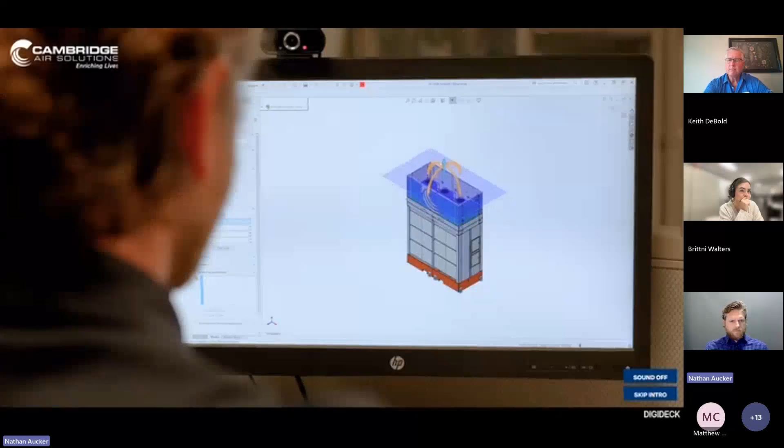Anytime somebody's really looking to change the indoor quality of the building, I think that's when Cambridge can really step in and start driving the ventilation requirements of the building, as well as heating and cooling it. We're looking to actually build healthier environments for people. It kind of started with us here. We like to do our product development, apply it in our facilities, understand the challenges we face, and solve them internally, then reproduce that for others who may have the same challenges in the field.

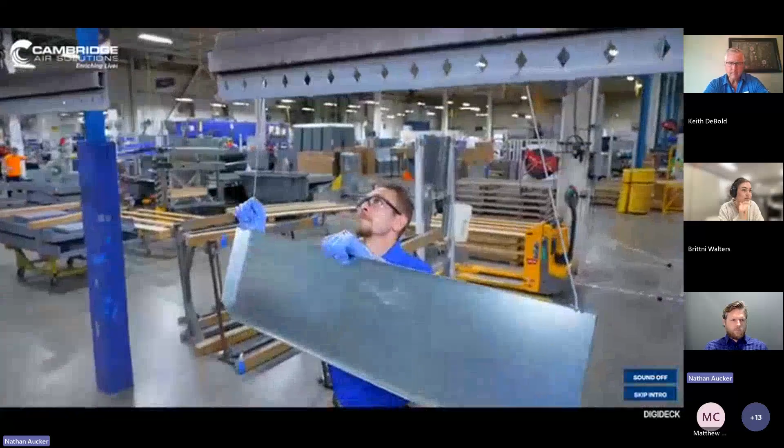Now we walk out in the middle of summer, it's 78 on a 110-degree outside day. The air is amazing in here, and I think that's honestly what we're trying to do for other manufacturers throughout the United States. The hardest thing to do when taking the first step towards a healthy working environment is to really understand what your options are.

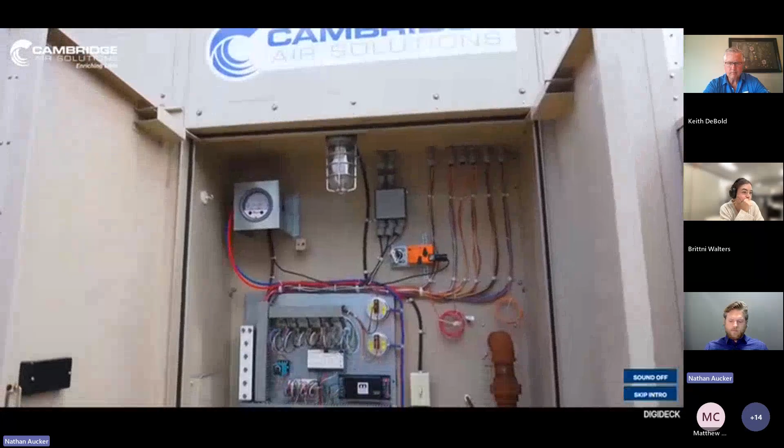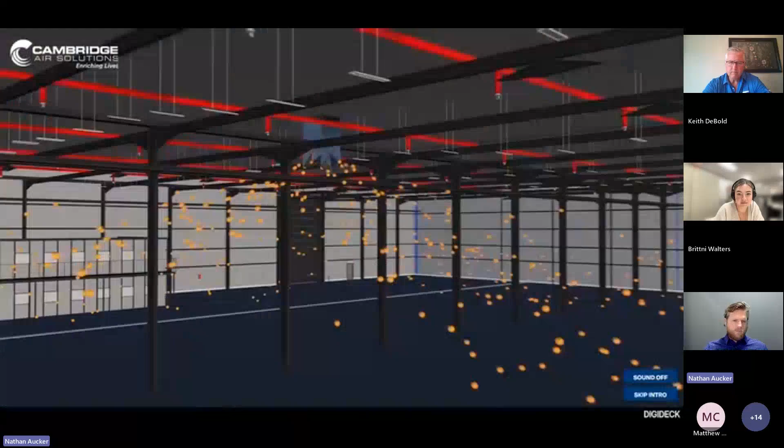Are they trying to solve for an energy goal, a sustainability goal, a decarbonization goal? Are they trying to solve for indoor conditions that are favorable to people? We first need to understand their challenges, what they're trying to achieve, understand their facility, maybe what processes are going on inside. Because we're not just going to say, oh yeah, give us a heat load, here's your quote, off with you.

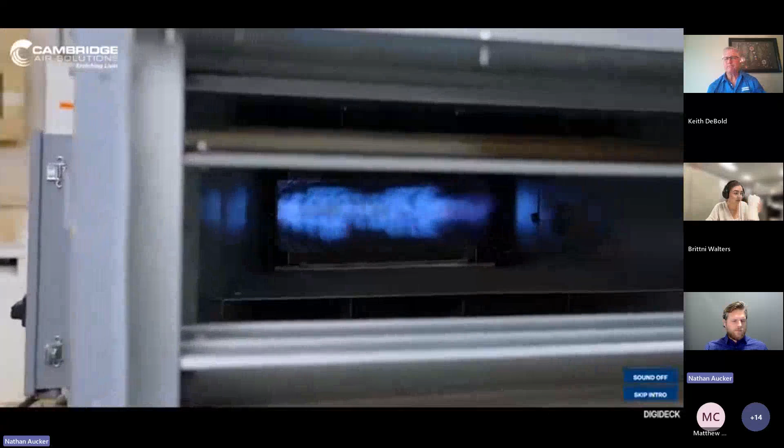We're going to actually have experts look over that design and ensure that we get the best possible solution for your building. We have built quality into our process all the way throughout the system. We test every unit that goes out the door to make sure it's functioning properly. We test the combustion, we test the airflow.

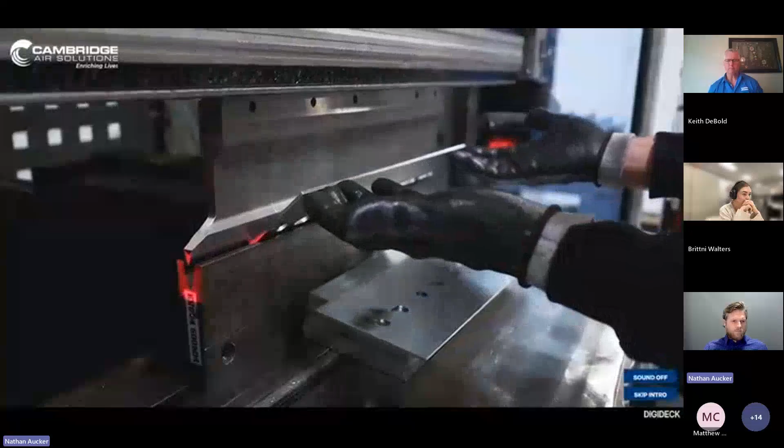This is not typical in our industry. Because we care deeply about quality inside our walls, that translates into building products that are going to last. That matters to us, and it can't just be for a couple of years. We want it to last for decades.

We talk about ease of doing business. We want to be the people that when you have a commercial or industrial space that needs heat or air conditioning, we're the ones you come to. Working with other companies, we're finding there's a desire for having a low carbon footprint and stewarding our environment. That rings really, really true to Cambridge and who we are.

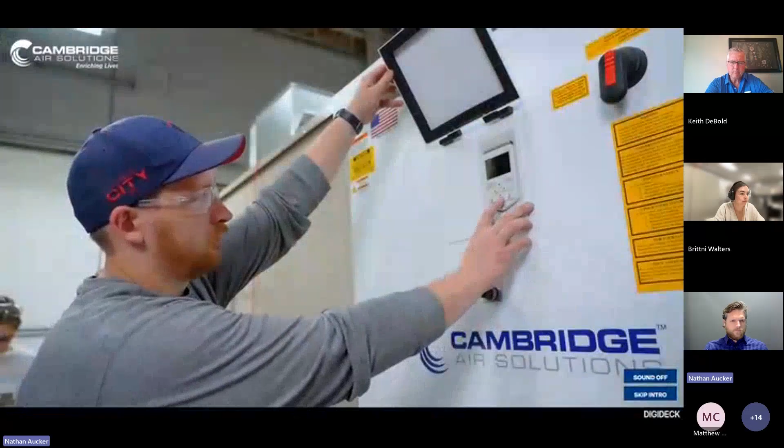For all of us to know that even the little things we do every day on the line, in the office, anywhere here at Cambridge, actually leads to another business having an enriched, fulfilling, and healthy working environment matters a lot to us. We exist to glorify God by enriching the quality of every life we touch. We are in that business of enriching lives through this system we've developed, but it's in our DNA, it's our big purpose, it's why we exist.

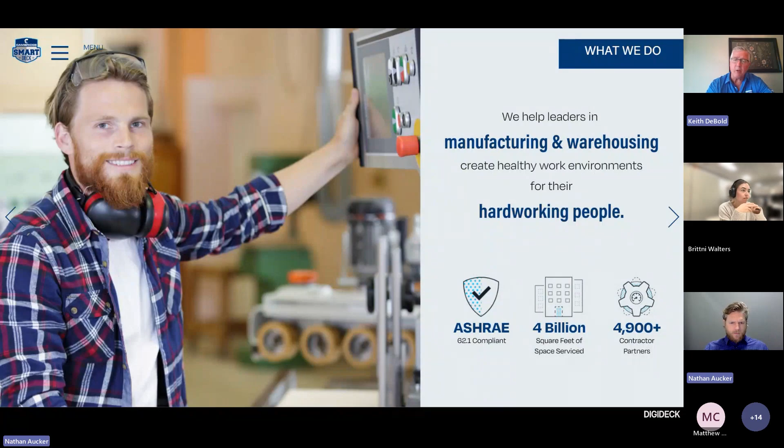So in summary, our sweet spot is heating, cooling, and ventilating open spaces such as warehouse facilities, manufacturing facilities, aircraft hangars, just to name a few. We have three aim points for the equipment we manufacture: to be the most energy efficient, to have the longest life, and to be available with the shortest lead times in the industry.

We go to market through manufacturers' representatives across the United States and Canada who are calling on mechanical contractors, engineers, and end users. Our rep partners team with our internal experts to develop building solutions that reduce our customers' energy cost, reduce employee turnover, and increase productivity and quality.

So when we talk about why it's important to build a healthy work environment: it's been interesting in our industry, facilities that people didn't look to cool, specifically manufacturing facilities. 5-10 years ago, there was a rush to cool these facilities. I have a customer who has multiple plants across the country, and they lose 20% of their workforce during the summer months because of elevated temperatures.

So the first reason people are rushing to cool these facilities is employee retention and to attract employees. Also, the second is the physical effect that the environment has on productivity and quality. And the third reason is health and safety.

So if we just step back and take a little bit of a snapshot, I'm not going to get too deep into this, but just to give you an overall view of the state of manufacturing in the U.S., and I'll couple that with Missouri since we're in Missouri. Currently, manufacturing is about 10.5% of GDP in the U.S., which is about $27 trillion. In the state of Missouri, it's about 11.7%, which is about $430 billion.

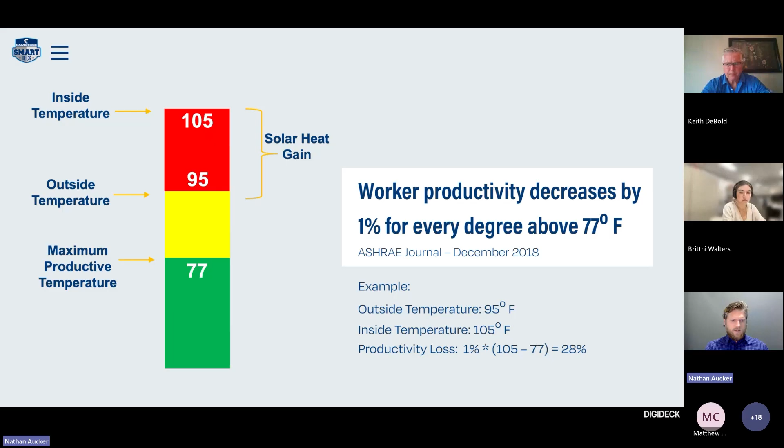So when we talk about worker productivity, Keith mentioned the ASHRAE journal study. We assume full productivity at 77 degrees for our purposes here, with a 1% increase or decrease in productivity over that. For our example, we're looking at an outside temperature of 95 degrees and an inside temperature getting up to 105 based on ventilation issues or solar heat gain throughout the day. That equates to a 28% productivity loss, which is very dramatic.

As you can imagine, heat also increases turnover, and there are costs associated with each turnover. There's absenteeism along with safety incidents and quits, and each has associated costs, not to mention recruiting, all of the infrastructure to screen, onboard, train, supervisor time, and the opportunity cost of the strain this applies to a business.

So, back of the napkin: if you take a quarter or half of a year's salary, 3 to 6 months, and your example is a $60,000 salary, that's $15,000 or $30,000 per employee departure. You can really quantify this impact by taking your monthly quit rate and your salary band, and replacing that with ramp timelines.

And we'll get into this here. Just want to pause for a second and show a quick example of what this cost of doing nothing might look like. So here we've got a facility in Kansas City, Missouri.

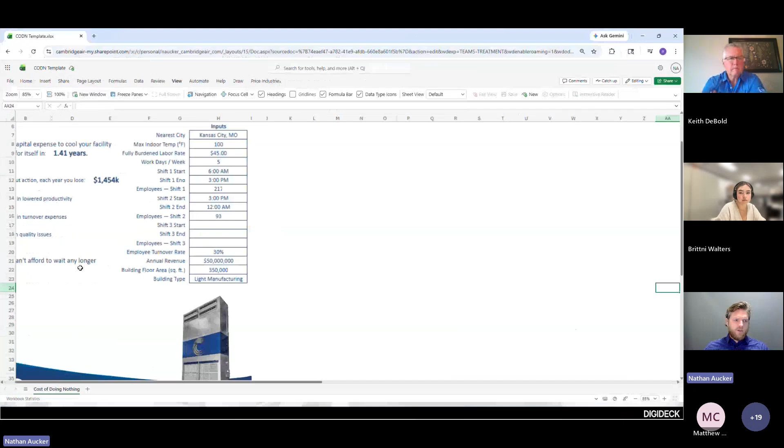This is a fake facility, but indicative of typical facilities, where you've got a max indoor temperature in the summer of 100 degrees, a $45 labor rate, and you can see the associated shifts and work days. Assuming a 30% turnover rate, annual revenue, and square footage for this light manufacturing space, the capital expense to cool the facility pays for itself in 1.41 years.

You can see here the key losses they are absorbing by taking a passive approach: $891K in lowered productivity that they are just absorbing, $500,000 in turnover expenses, and also some quality issues, which definitely matter but are on the lower side of the impact. The key things here are turnover and productivity and their impact.

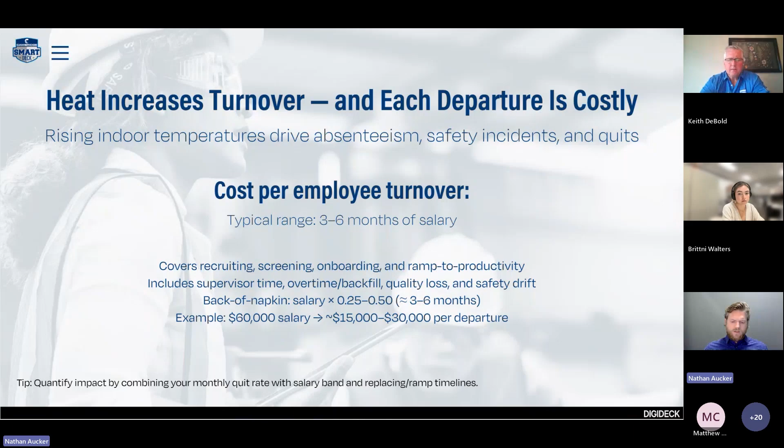We have the ability, if you have an opportunity, to check out what this might look like for you or someone you know, happy to run an analysis in more detail for your specific situation. So the key thing is there are costs associated with a passive approach here. Let's look into a specific application, a real life application.

In this situation, there's indoor heat exceeding 100, very similar to our fake situation. This caused discomfort, not to mention downtime for the facility. There's also variable process heat and exhaust from testing. This equated to 10 production shutdowns across summer '23 and '24 due to the indoor heat index. Their goal was a desired indoor temp of 85 degrees.

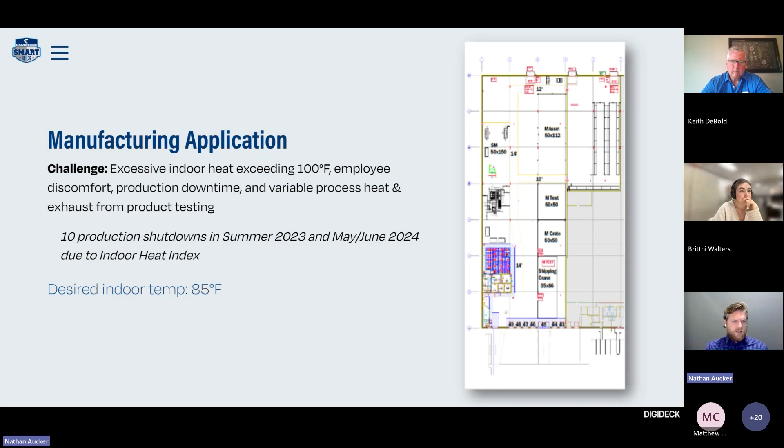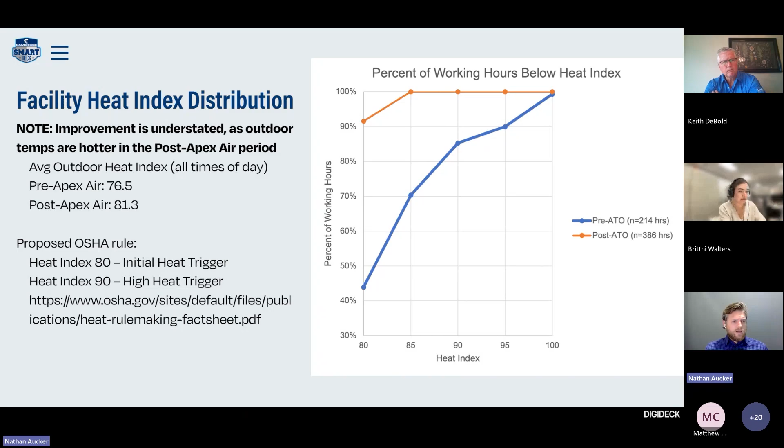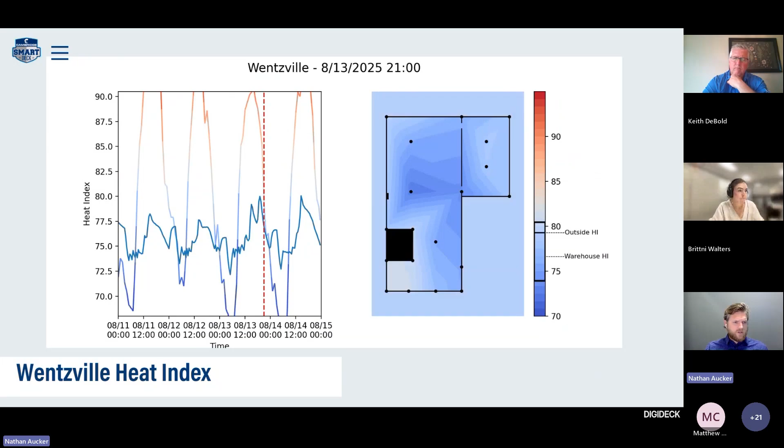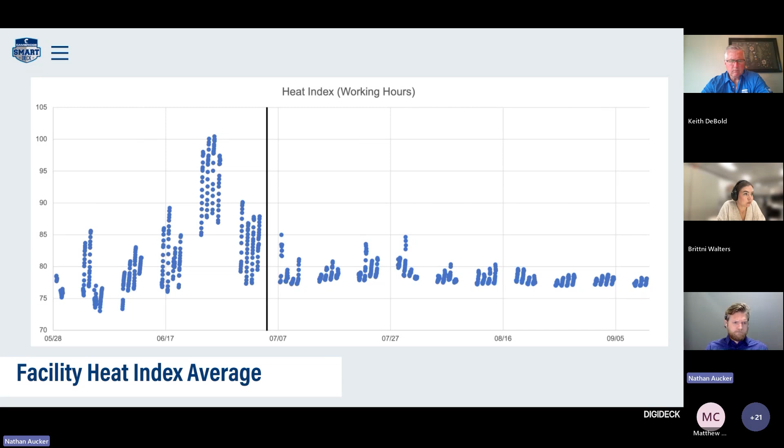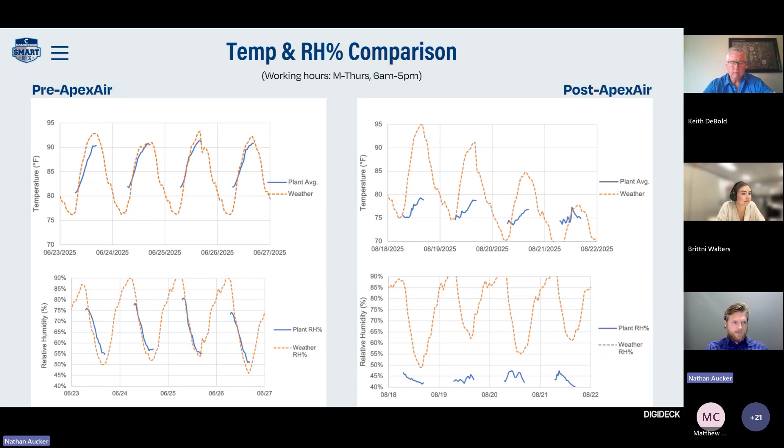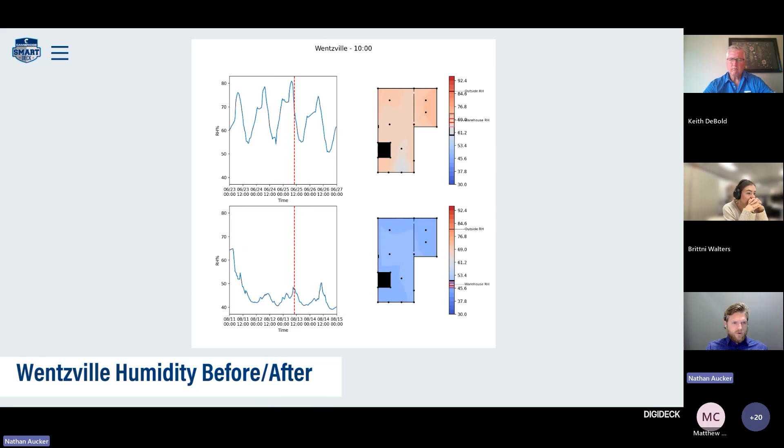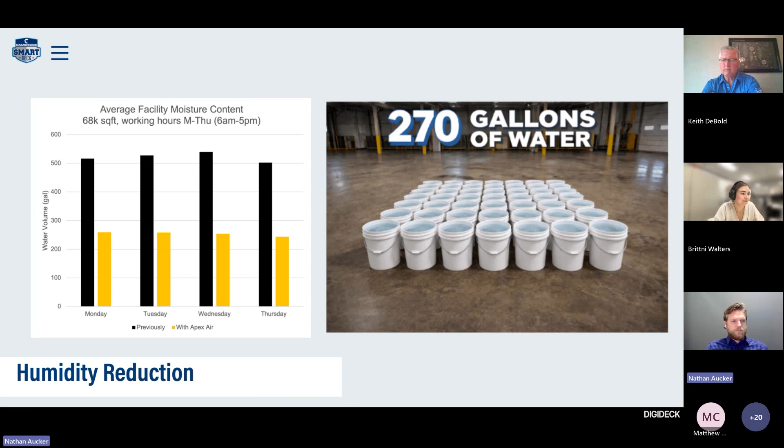When we talk about what it costs, the cost of doing nothing, the cost of passiveness towards the environment as a leader of a manufacturing or warehousing facility - a passive approach really means letting your environment dictate to you. This is about addressing your environment directly as a leader. The impact for a plant supervisor is he goes home with more energy for his family. For the plant manager, the leader of the facility, employee health, productivity, and morale are all improved. And from the finance side, from the CFO seat, the payback is both clear and fast, dramatic.

One thing to consider here is, what is your legacy? What is the story you want to tell about your impact as a leader someday to your children and grandchildren, both from a financial impact and also a real world human impact? How are you impacting people, and what is that long-reaching legacy you can provide them by impacting their environment?

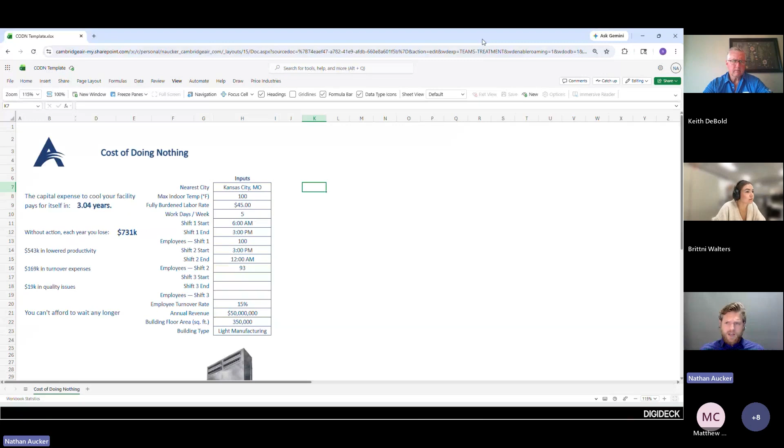One other question that we get quite a bit is, I see the payback, but what's the operating cost? Is that just crazy? And so we can work through that with you as well. What you'll find is for the payback, the operating cost is very reasonable, and actually not a big hurdle for most businesses. But again, each case is very unique, so happy to work through that in detail for your specific situation and goals.

So yeah, I think in addition, Nathan, having a facility assessment, taking a snapshot of your current conditions and first looking to optimize what you have is a pretty powerful tool. Absolutely.

Keith, can you elaborate a little bit more on your facility assessment process and what anyone can expect when they go through that process with you?

So yeah, it is obviously doing a site visit, documenting whether it's cooling, heating, or ventilating, and what's on site. R values, roof and walls, whether it's a cooling load, and really it's kind of pinpointing where do you want to be? Do I want a facility— Nathan talked about it, 77 in some of these environments is not possible. There's a lot of exhaust air going out. It's almost like trying to cool your house with all the windows open in the summer. So some of these are difficult environments, but it's really pinpointing where do I want to be on the curve? Do I want to be at 85 degrees, 80 degrees? And then what are my best options to get there? And what is the impact that it's going to have on my facility? So it's really matching the equipment to what your goals are.